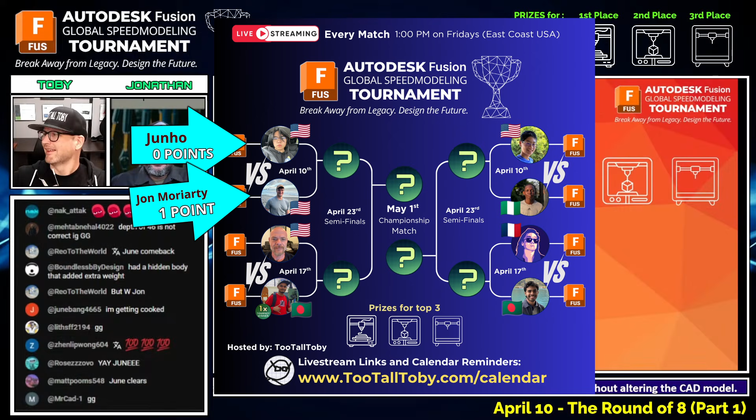All right guys, well listen, we're back again to the Wheel of Fate. We can't decide, I can't decide, Jonathan can't decide, it's not up to us to decide. The only real question here is, are these guys going to get a sheet metal part? It's the only thing we're really all interested in.

So let's find out from the Wheel of Fate. FPV Kev says 7 please, Mr. CAD says 01, and Matt says 06. Let's give this thing a spin and see what we end up with here.

There you go, Matt, ask and you shall receive. Wow, how did you do that?

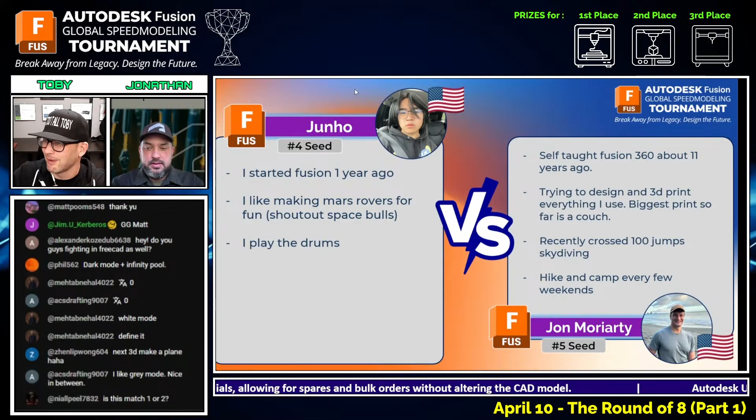Okay, so it looks like we're going to be taking a look at our next drawing here. Drawing number 6, here we go. This next CAD versus CAD battle between Junho and Jon Moriarty. If Jon wins, he moves on to the semifinals. If Junho wins, we all win because we get to see another match between these guys. Here we go, in 3, 2, 1, go.

And so we see here, this one is a wooden part. It's called Wooden Jig, and this part is made from American cherry, 570 kilograms per cubic meter. And the question is, what is the mass of this part in XX.X grams? Tolerance is plus or minus 0.1 grams.

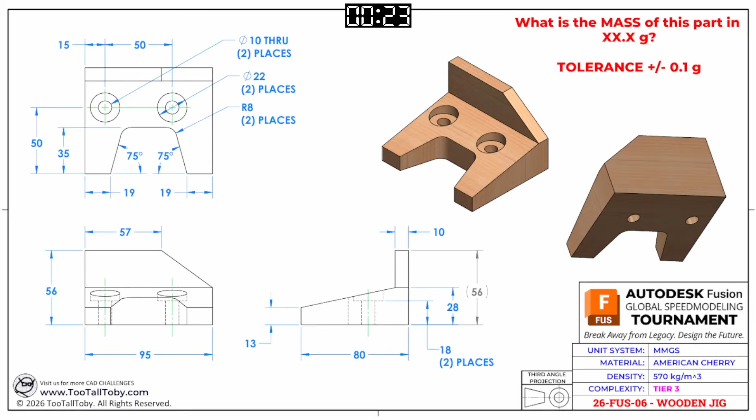And this is probably something that looks familiar to you, Jonathan, as a woodworker, maybe setting yourself up with a jig here to line up some holes. Looks like both of our runners are getting into the model here, so let's flip over to this CAD versus CAD window and see how they do.

It looks like both of our runners decided to start with a sketch, looking down from the top at this thing. That's what I would have done. Yep, I like it, start with the perimeter and then start hacking back from there.

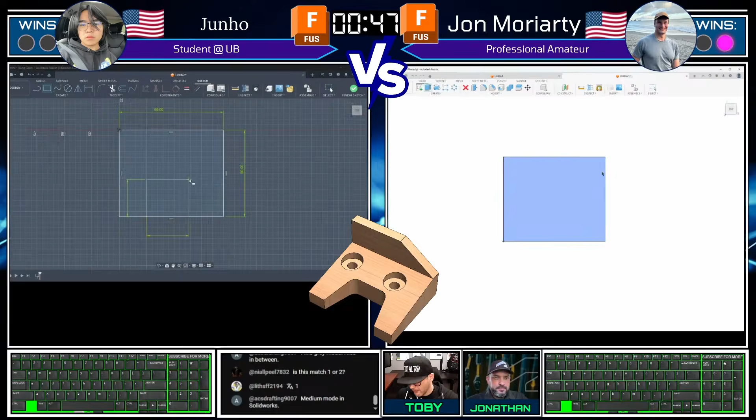Yeah, a part that's not symmetric. A lot of the parts we see here in mechanical engineering are symmetric, but we also need to understand strategies when a part is not symmetric. Where should the origin be? Interesting that they put it in similar locations, but not exactly the same location.

Yeah, Junho's got top left for the origin, and then Jon's got bottom left. I would have done bottom left, I think, I tend to think of that as sort of the starting point if I'm going to draw something this way.

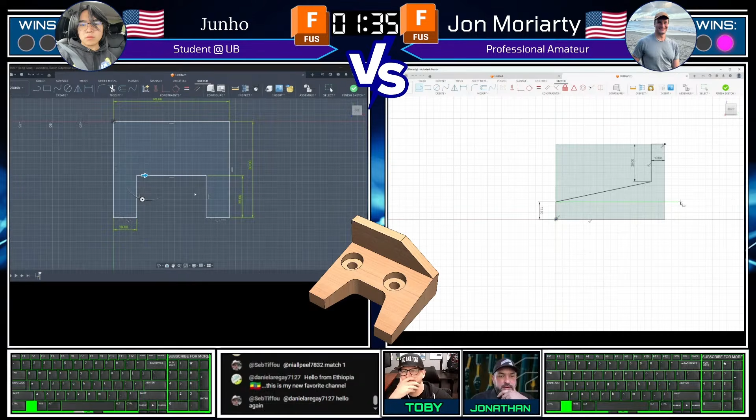Interesting choice there by Junho, he's got perpendicular lines for the cutout for this thing, and he's going to use that. It looks like he's using the chamfer tool in the sketch to get his angle there. Yeah, which is definitely a way to do it.

Okay, and Jon, he's kind of getting the full volume of the thing first, and then it looks like he's going to go from there to sort of carve out the rest of it. Almost like a subtractive manufacturing.

Yeah, I think I would have done it the way Junho is, as far as drawing out the plan view. I think that's how I would have approached it, but I think Jon's doing it a little bit more the way we recommend, where you keep your sketches simple, you have more sketches, and then go from there.

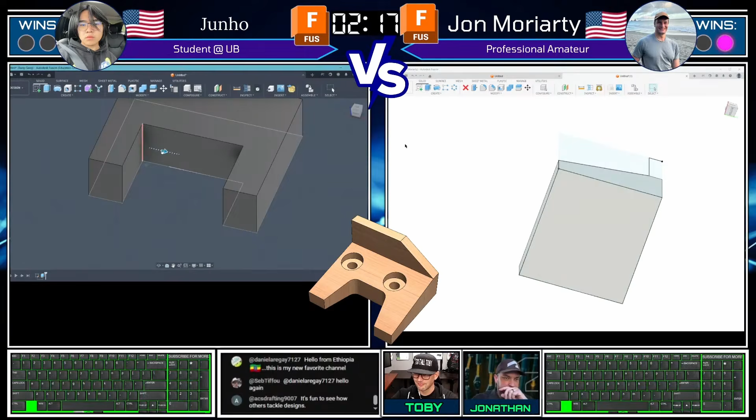It does make it easier to control things, to not have too much information in one sketch that can obfuscate things, can make it a little bit harder to find issues and fix things down the road.

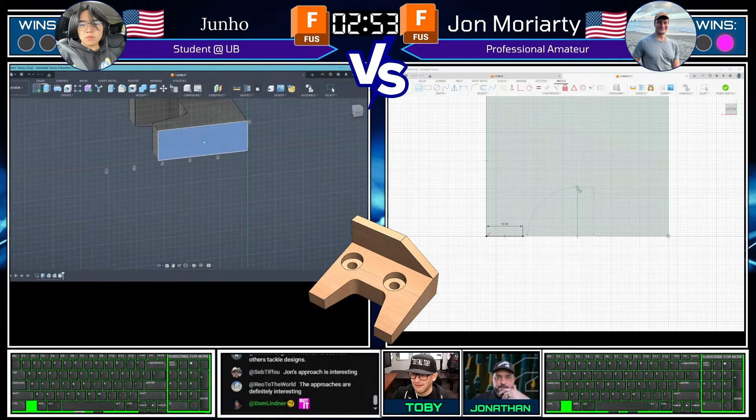Yeah, I'm definitely more in that school of not having the sketches too complicated. I like to keep my sketches simple, but I also like the way Junho is doing this too. So I think both techniques are working here, it was interesting to see.

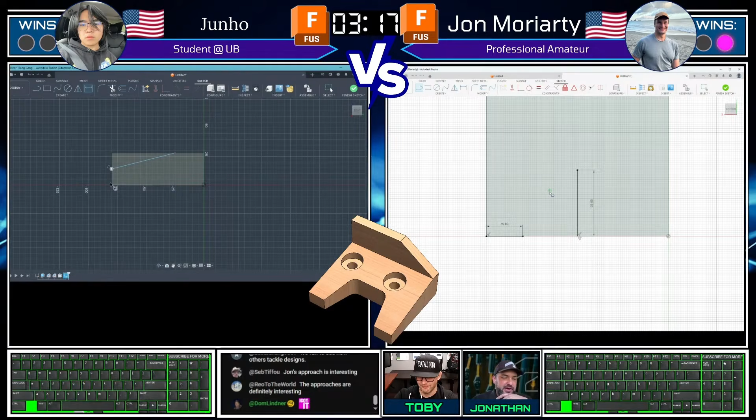Wow, look at how fast Junho's getting in there. What's he doing there, chamfering off that front edge? Yeah, he likes to do things with chamfers, I guess. For a part like this, I would have done what he's doing now, which is make a sketch profile there, just because it's such a shallow angle.

It might be a little bit more difficult to control it. And sometimes depending on where the dimensions are coming from, chamfer might not be the best tool, like if it's not coming from the original corner, but from the other corner, like what we're seeing here.

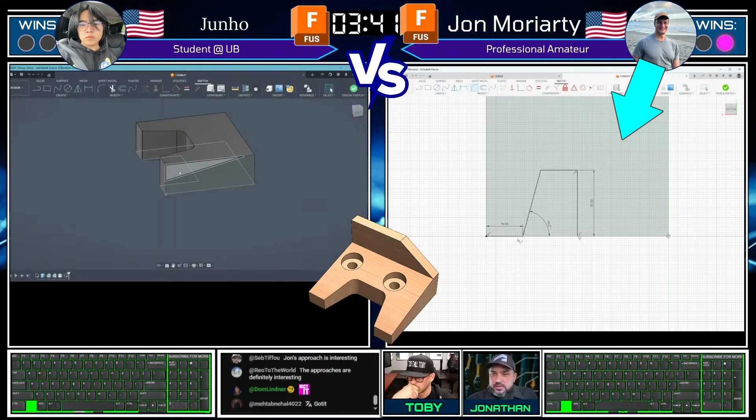So now it looks like Jon's going to do a mirror operation here. He's just working on one side, and he's got a center line there, and that's going to make it easy for him to either mirror the sketch or the 3D feature. Got it. Whereas Junho just built the whole thing as a 3D feature there.

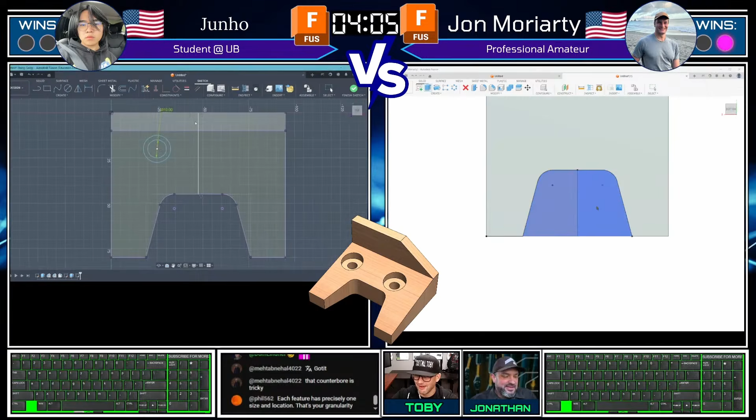Junho kind of goes in bursts, like he gets going a little bit and then it's kind of hung up a little, and then comes back with another burst of speed. So very interesting to see the two different approaches.

Now we're in a spot where we've got this counter bore scenario, but these are always interesting because the counter bore is defined not from the top surface with a depth callout, but instead more like from the bottom surface where it's on an angled face, and you want that bottom surface to have a consistent wall thickness. These are always interesting challenges to try to solve.

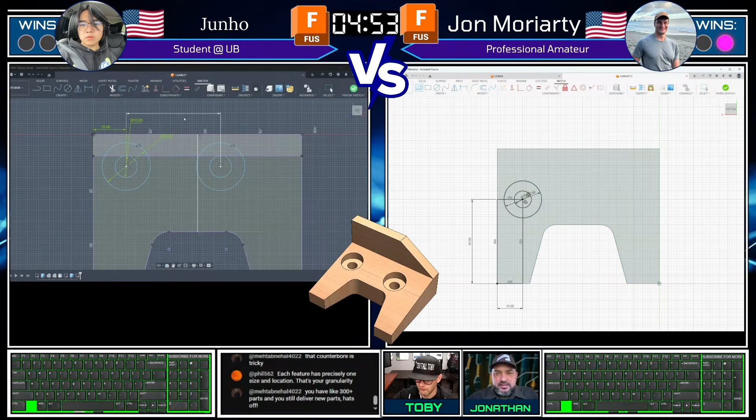Yeah, I think I probably would have used the hole tool for these. If you don't use it a lot, sketches tend to be more intuitive, I guess, and people tend to think like that more so than this tool that adds a hole. But with the hole tool you can do the full dimensions of everything, the counter bore, the type of hole, whether it's countersunk or a flat profile like the way this is drawn.

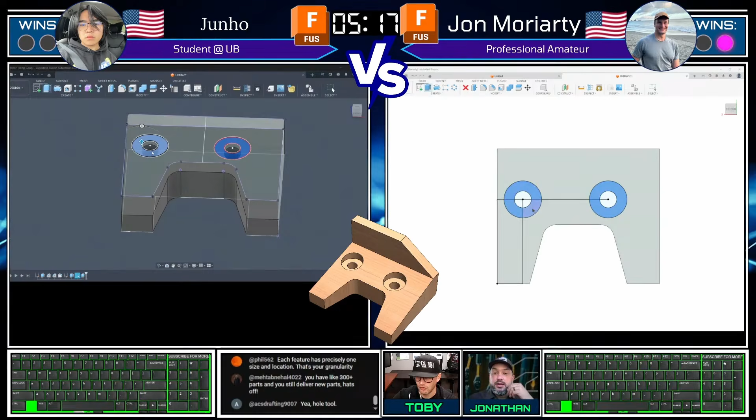You can just draw your points in a sketch, dimension those the way they need to be, and then do that tool and you're done. But I think the challenge with the counter bore in this spot is that maybe Fusion can do this - I know in SolidWorks I'd always run into problems because the face where the counter bore depth is defined is that angled face, so it's a little harder for me in SolidWorks to get that face, you know what I mean?

In Fusion you would do a sketch either on the bottom or parallel to it, where that edge meets the vertical wall, and you can go from there and it'll just bore through whatever 3D is in the way. That's cool. Yeah, that's very cool.

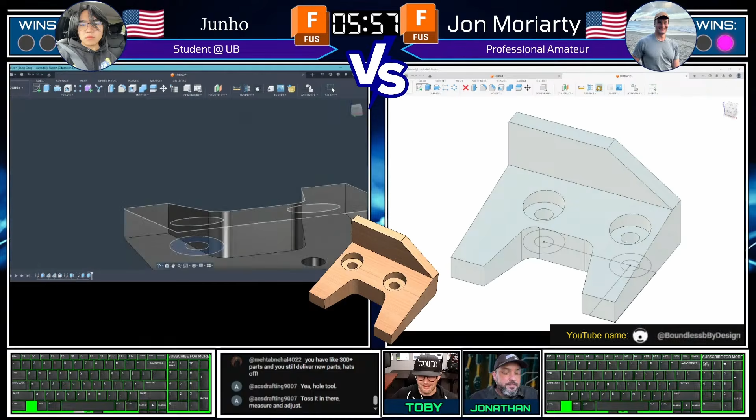I gotta check - now it's tricky from this point of view though, because you'd need to do the math, right? You'd have to be like Boundless by Design.

Sorry for cutting you off. That's the only time I'll ever cut you off, Jonathan, if someone comes in with an answer. Boundless by Design comes in with an answer, 85.4 grams, and that is correct.

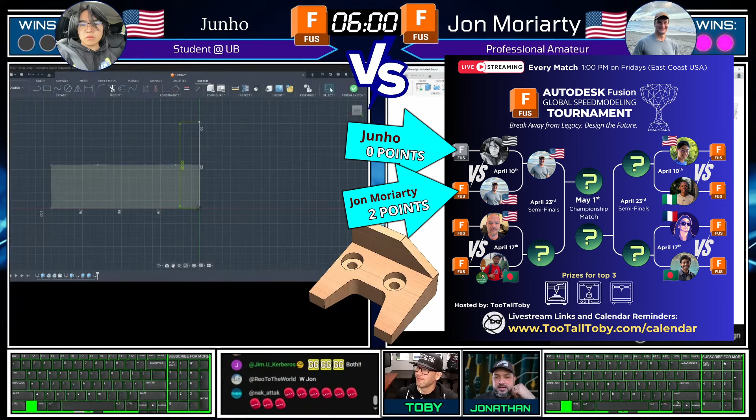Toby, I'm sorry man, I've got a meeting right now I can't miss. Is this going to keep going from here, or are we about wrapped up? Okay, well I'm going to jump back on if this meeting is done in a timely manner. Okay cool, well thank you so much for the awesome commentary.